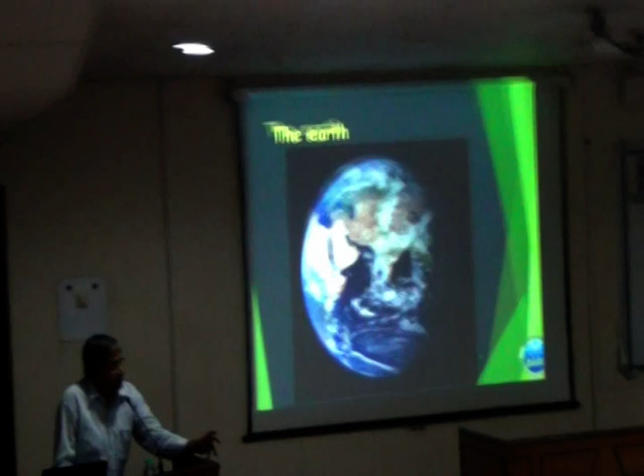And of course, universe, you see so much of light coming, solar system, you see so much of light coming, but you may be wondering where from Earth is giving us radiation. Earth has in it uranium-238, thorium-232, then potassium-40, then radium and all other things which give you a lot of radiation. But more important, comparatively recently it has been found that we get anti-neutrinos from the center of the Earth. What does it mean? That means some nuclear reaction is going on inside the center of the Earth.

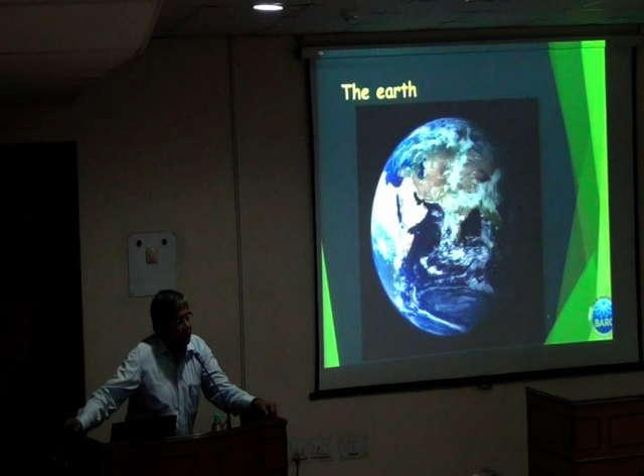And one of the hypotheses is that there is a core of uranium about 8 kilometers in diameter at the center of the Earth. Nuclear reaction is continuing, and you are getting heat and radiation out of it. And another number I can talk about is that whatever radiation Earth receives from the sun, it emits double that radiation. Where from is it coming? Again, it is coming from radiation only in this form. So radiation is something you cannot avoid. But I am not talking about this topic, but something more.

Then, in the time scale, humans evolved 2 billion years later, and everything was fine about this environment till 200 years ago, when our friend James Watt, our scientist, our engineer James Watt, I think you have to say he is the topmost engineer because the industrial revolution started with his discovery. So these 200 years we have done everything that is possible, of course slowly, to pollute the air, to contribute to global warming, and this has started challenging our own existence. So it is much more important than what we can think of.

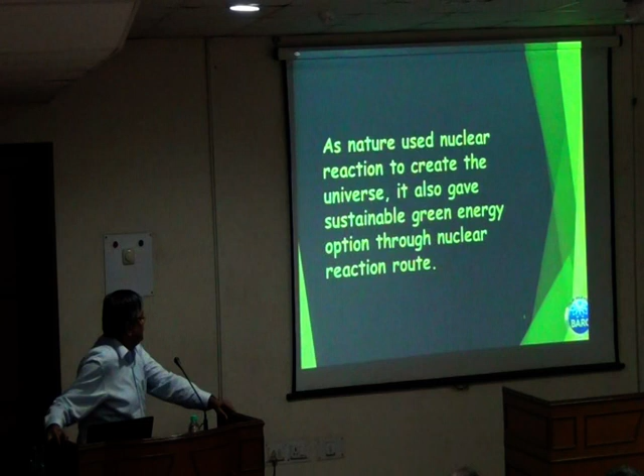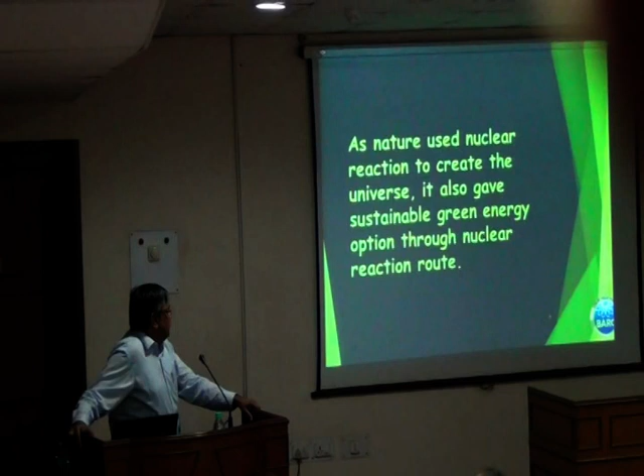But at the same time, when all this is happening, nature has given us an option to use nuclear reaction, which was the nuclear reaction used to create the universe. The same nuclear reaction can be used to form a sustainable green energy option. So nuclear reaction, I am not talking only nuclear energy, nuclear reaction would obviously mean solar and nuclear power, which we talked about.

Then quickly, what is the tool that is available with us to use this nuclear reaction or nuclear energy? One is, of course, you burn uranium in a reactor, we will go into more of it, but in our country we have got very little uranium by the standard of the energy demand that is there for us, which is about 2 lakh tons, and out of that about 1 lakh ton will be useful. And this 1 lakh ton of uranium can give only about 10,000 megawatt electrical power capacity, which is going to last for about 60 years. Every plant that we make will last for 60 years. What happened?

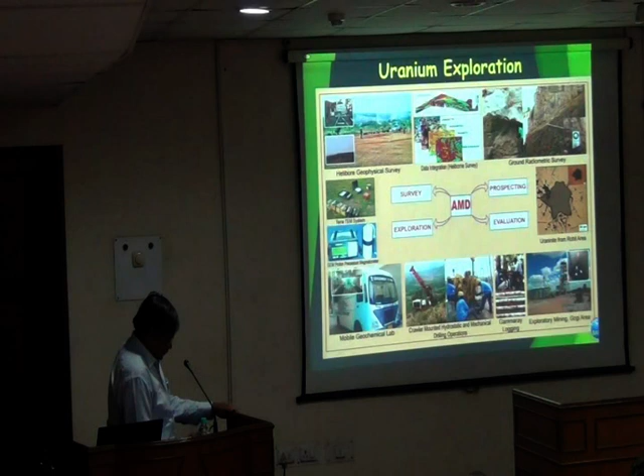Then they have mines at 3 places, all these areas that are being shown, and there are 3 places where they process, and this goes to the place known as Nuclear Fuel Complex. As a matter of fact, I know that at least 2 persons mentioned to me Dr. Chaitanya Ganguly. Chaitanya Ganguly sir was chief executive of this place for quite some time.

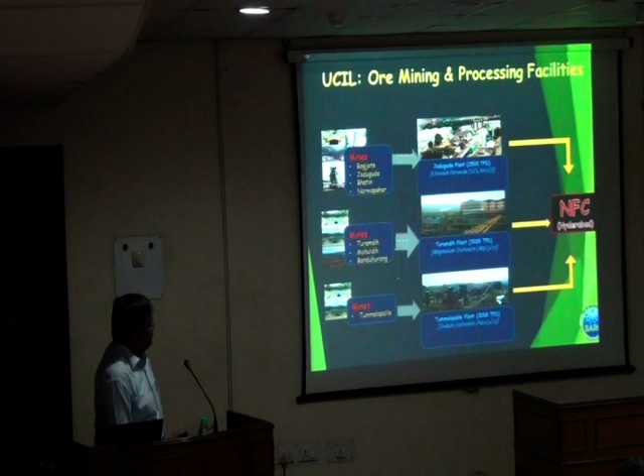Now here what happens is that this uranium corporation, they take out the uranium, which is in U3O8 form, it is converted to UO2 powder, then it becomes pellet, that is by powder metallurgy process, and then it is put in this type of tubes, which is made up of zircaloy, and then these pellets are put into that and sealed. This is what we call fuel assembly.

And obviously to make this, we have to do one more thing, is to make these cladding tubes in which these pellets will go. So to do that, we start with zircon sand, which is there in Indian soil. From that it goes to zirconium oxide, zirconium sponge, zirconium alloy, and fuel tube components. Finally it comes out of this. And that's how it makes the fuel assembly.

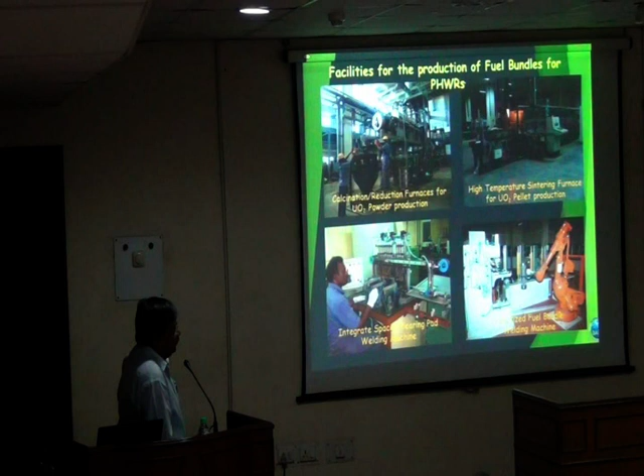This shows some of the pictures of this particular plant, nuclear fuel complex. Maybe if some of you are interested, you can always tell us. We can arrange a visit into this place. And by the way, whatever I am showing you, if anybody is interested, particularly my student friends, you are always welcome. Come in a group and you can always see that.

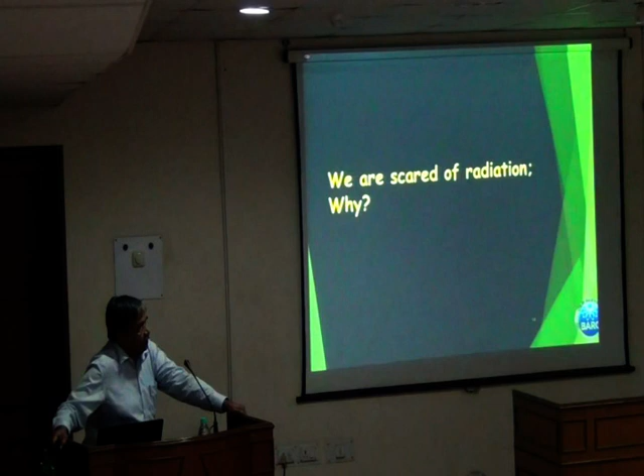Then let me take a deviation. So you know now what is the way to explore or exploit the process of radiation to get energy. Whether it is green or sustainable or not, that question we will answer at a later point of time. But we all know and we all agree that we are scared of radiation. But why?

See, again, all of you know that the universe was formed with a Big Bang. That is as far as today's science is concerned, they tell us that way. And this Big Bang has happened, and we are not unhappy about it. Because anyway, it happened long back, when we were not there, and it has not caused any damage that we can think of.

I take a further diversion here. This Big Bang, it is just to tell you how Indian science is progressing, because at least part of you are science students. See, we have a telescope, which is the MACE telescope. This is 21-meter diameter, coming up at a place known as Hanle, Ladakh, where the temperature is minus 40 degrees C, absolutely no humidity, and the sky is always clear. So that is the best place to receive radiation.

What happens is that those radiations coming from 14 billion light years away, that means which were formed at the time of the formation of the universe, they reach the Earth's atmosphere, and then they convert into what is called light flashes or Cherenkov radiation, and that is what is picked up by this, and then data is analyzed.

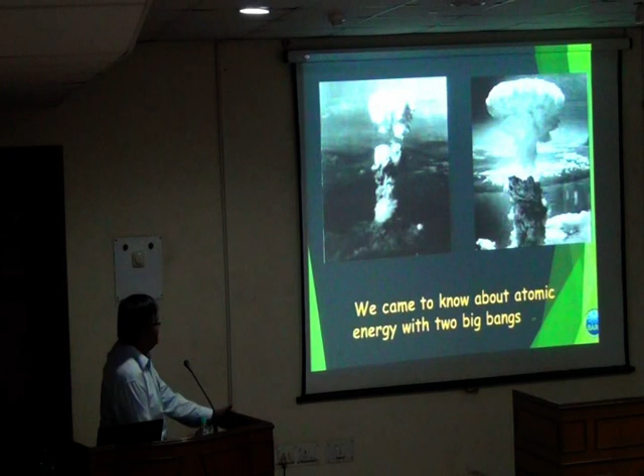But then why are you scared of radiation? Reason is simple, that humans came to know about radiation through these two Big Bangs. One at Nagasaki, another one at Hiroshima. That is why we are scared of it, and we are right about being scared of it. But if you know the true story, then actually this has to be analyzed and seen in a different way. So we should be scared of atomic bombs, but there is no need to be scared about radiation.

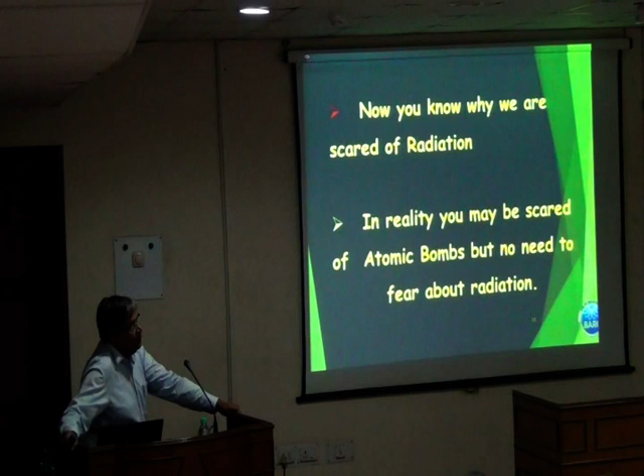And the easiest way to appreciate that is that all energy around us is originating from nuclear reaction. Somebody will ask where wind energy or fossil fuel is coming from; you think it over, everything is originating from nuclear reaction. So what is wrong about nuclear reaction? This is only giving us energy. We get radiation from the sun, we get radiation from the earth, we get radiation from home as well as this auditorium, and we also get radiation from medical checkups, air travel, etc.

So this gives you some number. The total amount of radiation received by one average human being who is not a radiation worker or doesn't stay in the radioactive area is of the order of 2.4 millisieverts per year. And out of that, 1.4 millisieverts come from just the air he breathes. You cannot stop breathing air, so you are going to get this much. You have to live on the surface of Earth, so you are going to get this much radiation. You have to eat, and you will get this much of radiation.

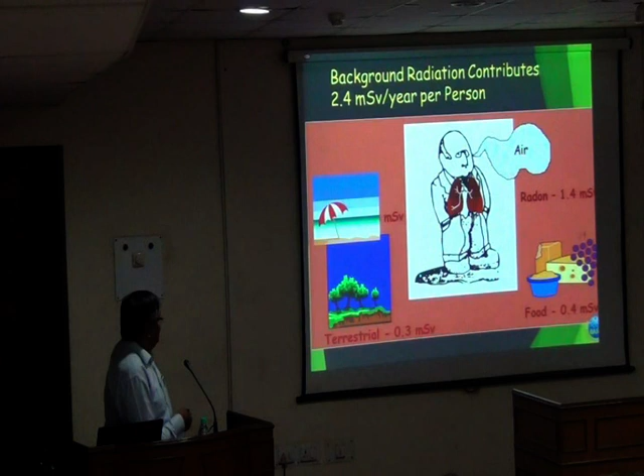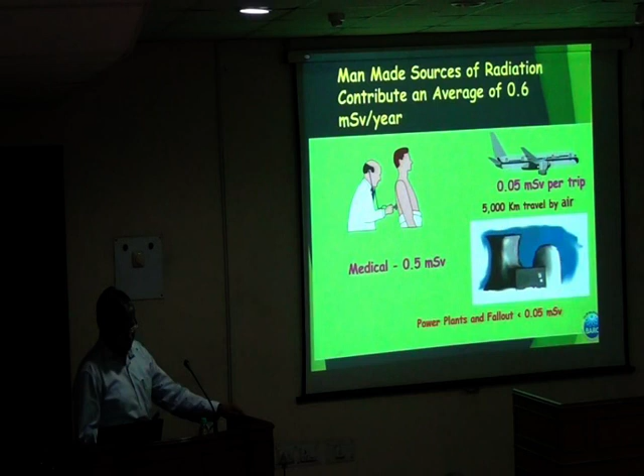And similarly, all other sources. Now, next slide you have a look. See, if you are going to take a simple X-ray, you will get 0.5 millisieverts. If you have traveled about 5,000 kilometers, that means, say, Calcutta, Bombay and back, I am going to get this much radiation by the time I reach back Bombay, just because of this travel. And if you live just at the edge of a nuclear plant, you are going to get 0.01 type of number. So why are you scared? There is nothing to be scared. Or those who say they are scared, why are they scared?

Now there is one more finding, and maybe it's going to become more accepted 5 years from now. We are doing a lot of research in this. See, Kerala, one edge of about 400 kilometers has got a lot of radioactive material in terms of thorium, and that gives you a lot of radiation. Those people who have been living there for hundreds of years get much more radiation than the 2.4 millisieverts I told you about. So blood samples from them have been taken, and they have been irradiated to a very high level of dose. And then we see after that irradiation how fast DNA is recovering. So the finding is something of this type.

If you are living in this high radiation area, your DNA repair takes this much time. Whereas if you are in the lower level of radiation area, it takes more time. That means it is indicating that probably it will be well established in a few years from now that if you have been exposed to irradiation, you are going to recover from irradiation damage much faster than if you have not been.

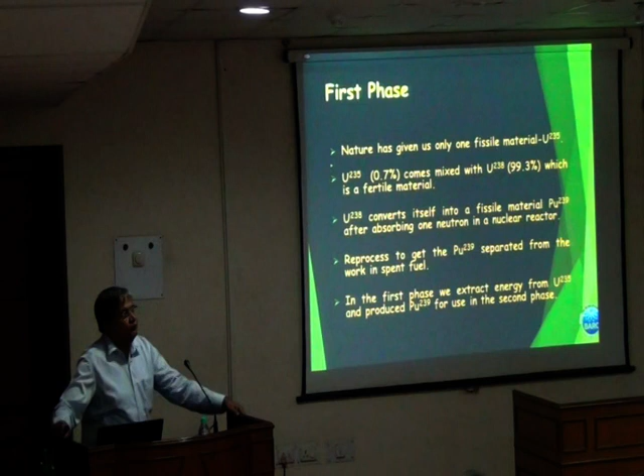Uranium-238 converts itself into a fissile material, plutonium-239, after absorbing one neutron in a nuclear reactor. In every nuclear fission, you bombard a uranium-235 atom with a neutron, it will give 2.5 neutrons. One neutron will go on to produce plutonium-239, the other one will go to produce the next fission, and half of it will get absorbed in the structural material. So as you are burning some uranium, you are also producing plutonium-239. And this is a man-made fissile material on the surface of Earth.

Then we have a process known as reprocessing, which I have been working on for quite some time. This plutonium-239 is taken out from the spent fuel, and it goes back into the reactor as the fuel for the next phase. In the first phase, we extract energy from uranium-235 and produce plutonium-239 for use in the second phase. And just to give you an idea, in the PHWR type of reactors that we use, for every neutron we burn, we get about 0.8 amount of plutonium-239.

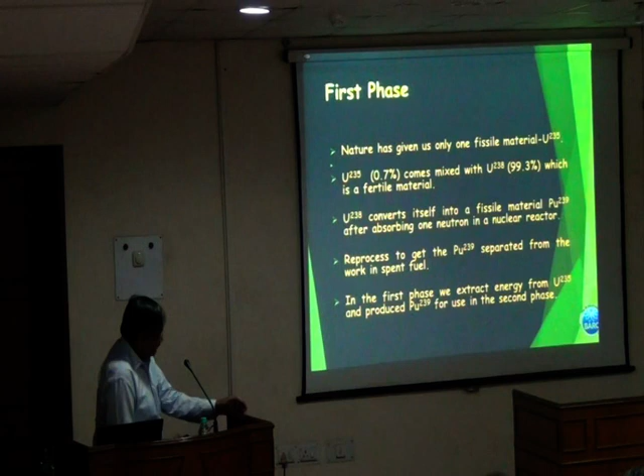And the same thing happens in light water reactors. That is, two types of thermal reactors are there. Light water reactors I will talk about at a later stage. Let me not confuse here. Then this PHWR, which is our mainstay as of today, is a vessel in which heavy water is there, and there are pressure tubes in which the fuel assemblies are kept, which you saw earlier.

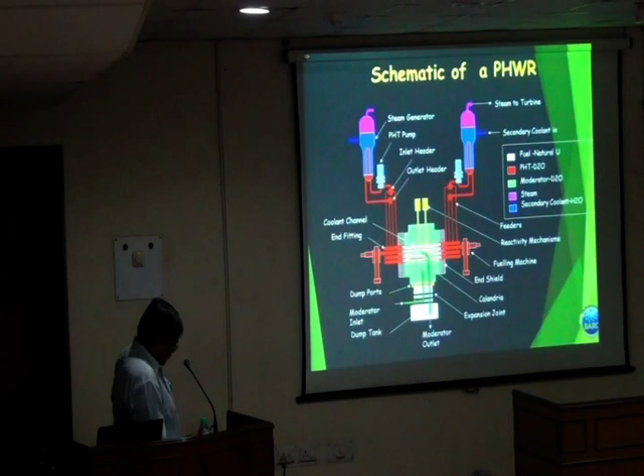And there are two fueling machines: one pushes fuel from one side, the other side receives it, and new fuel is again pushed in over there. So this is what is known as on-power refueling. And heavy water is again passing through this, going to the steam generator, where it produces steam to be used in the turbine, and then again it recirculates. This is basically PHWR. I will not go into more of this.

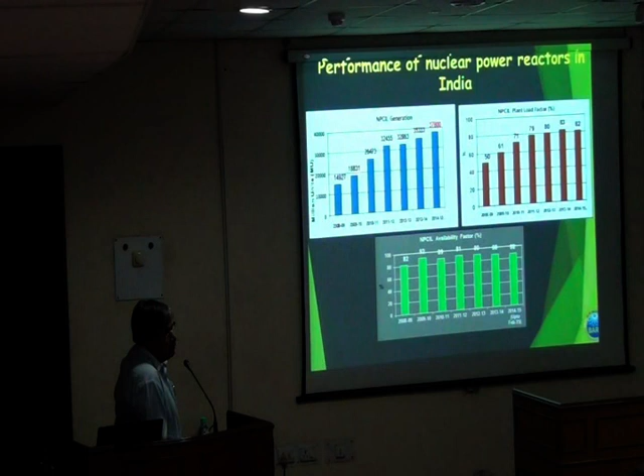But see, in terms of technology, where do we stand? Our reactors work at about 82% capacity factor, and generation is increasing continuously, and this will be more clear at a later date. And this is among the best in the world. With these reactors, you just start it and then forget it. No, you cannot forget it, but it continues to operate, and it will continue to operate for 60 years. There is no other system which can compare with this. And as I was telling, we are doing very well.

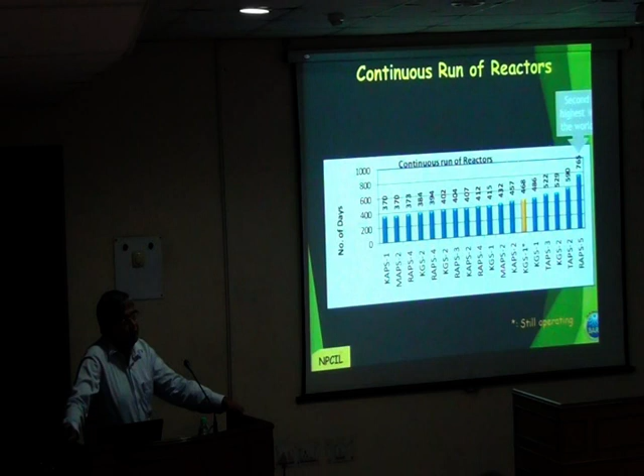We have one reactor which has operated continuously for 765 days, and we had to stop it because the safety committee wanted us to stop it. They didn't allow us to continue further, as there is a rule that after about 2 years of operation you have to take it up for inspection. And this is again the best in the world. Although it is written as second highest, second highest means the other one happened 40 years back. Today, one will not be allowed to operate a reactor in this type of condition. So this is the best in the world as of today.

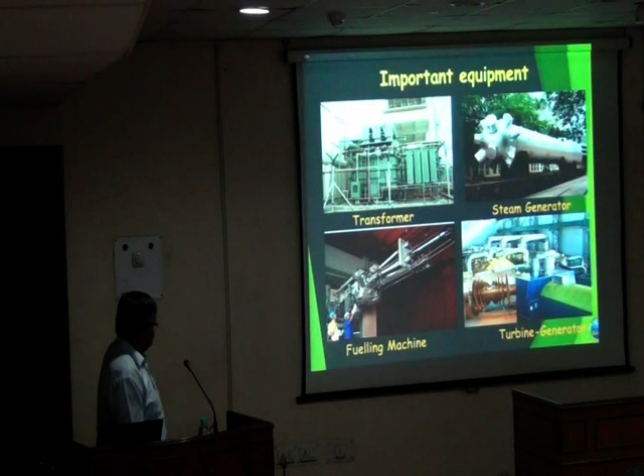This shows some of the components that are there. This is the fueling machine that is being talked about. And as a matter of fact, in this type of reactor, the fueling machine is the most complex component. Then let us go to the second phase. The second phase is slightly different. We make fast reactors using leftover uranium-238 and plutonium-239 from the first phase.

But there is another beauty of this system. Fast reactors produce the required amount of energy and also produce more plutonium-239 than they consume. It means that if you have consumed one plutonium atom to produce the energy, you will get back 1.5 times, 1.3 times, 1.2 times, some such number, much more than what you have consumed. So you put this plutonium back into the reactor to continue the operation, and also take out the extra plutonium and make a new reactor after you have been able to fill it up. We call that doubling time.

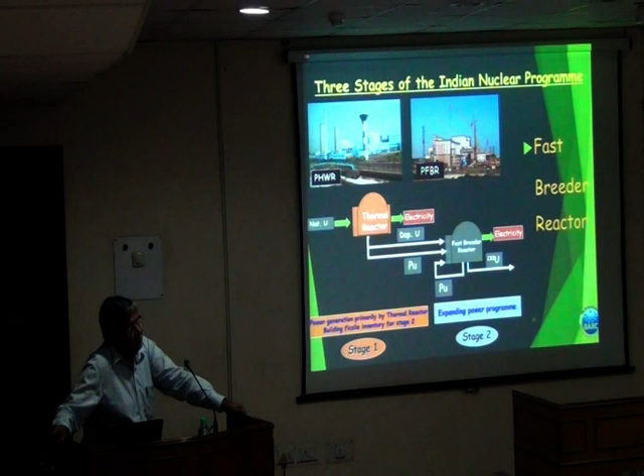And then, as we said, from the thermal reactor the plutonium is going into the fast breeder reactor. Again, plutonium comes out and goes back. Extra plutonium will go to another reactor, and it is also possible to put some thorium into that and produce uranium-233. This we are not going to do now. Towards the end of the program, we will see when exactly these thorium reactors are to be introduced. Because this is one question we are quite often asked: India has so much thorium, why are you not using it? The answer to that is in the next slide. But before that, this is how the PFBR looks at night, quite beautiful.

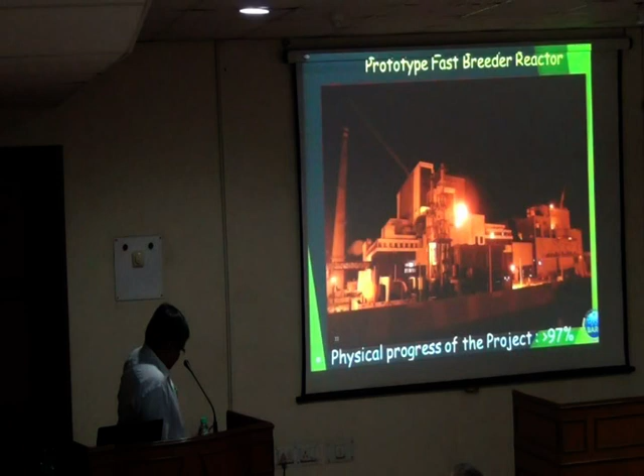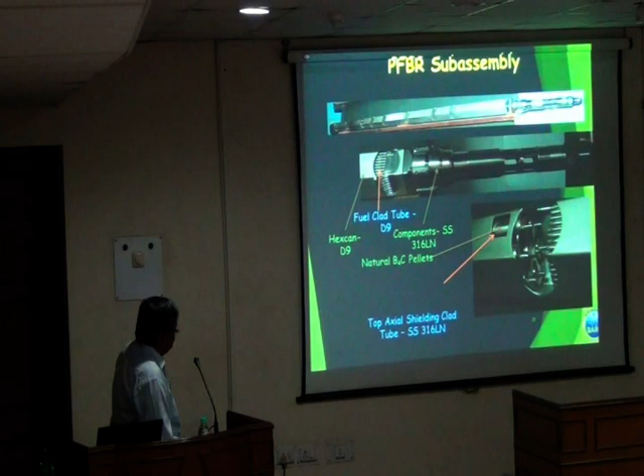This is how fast reactor fuel actually looks. These are the fuel pins, and they are filled with plutonium-uranium fuel. This shows some of the components over there.

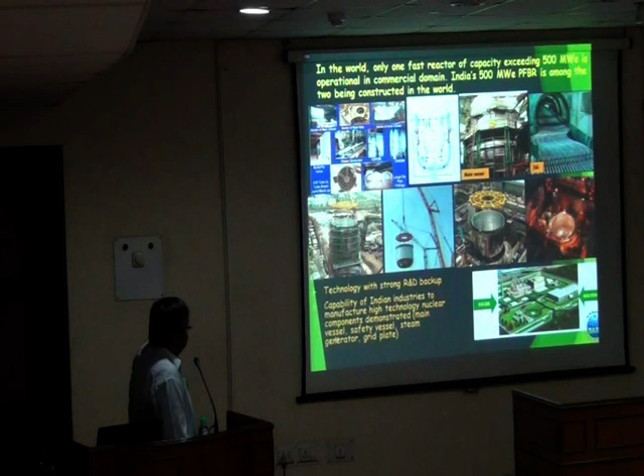Now let us go to the third phase. We convert another fertile material, thorium-232, into fissile material uranium-233. One thorium-232 atom absorbs one neutron, and then after 2 beta decays, it becomes uranium-233, which is a fissile material, again a man-made fissile material. The third phase of reactors are started with plutonium-239 as fissile material, or uranium-233 produced in the second phase of reactor by making thorium-232 absorb one neutron.

And this is what exactly will happen. You will probably come to know about this 50 years from now, when we start introducing the thorium reactor, which is not required now.

Uranium-233 and thorium-232 is separated from waste material by reprocessing of spent fuel in this phase also.

So this is PHWR you have seen, this is the prototype fast breeder reactor you have seen, and this reactor we have not made yet, but we are in the process of site selection, which has been completed, and maybe in a year or so we will start construction of this.

And this is again on the same cycle. First it has gone to the thermal reactor, plutonium and uranium has come out, it has gone into the fast reactor, plutonium has been recycled, and then probably uranium-233 has been taken out, and it has gone to the third cycle, and it is going on in that way.

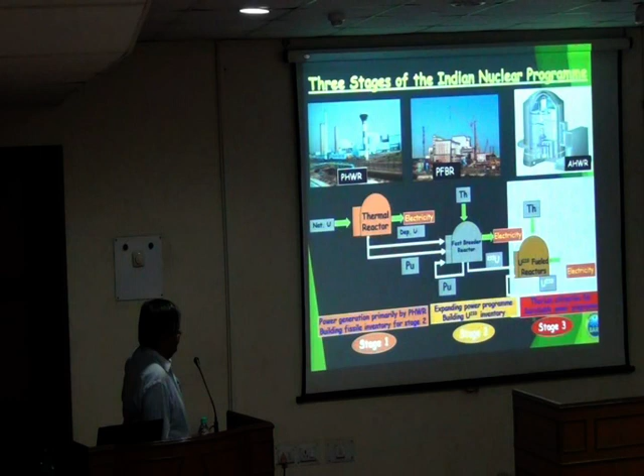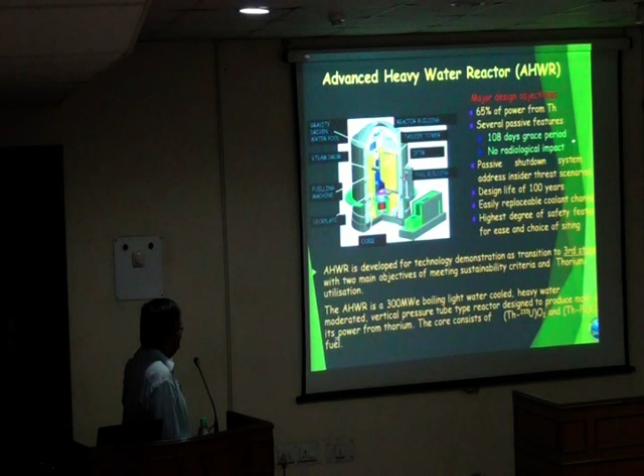And this advanced heavy water reactor, which I talked to you about, will be using about 65% thorium fuel, where 65% of the power will be produced from thorium. This will have 108 days of cooling period, that is, it can tolerate no electric supply or no water supply from outside. You know about Fukushima and what has happened there. So it is a very long time it can withstand, remain intact without getting into any problem on its own.

Then, the life which I was talking about as 60 years, here the operational life will be about 100 years. And there are other features too. This will be a 300 megawatt reactor. Okay, this describes the system which I wanted to show.

Now let us see what is the status of nuclear power as of today in the country. The present capacity is 5780 megawatts. It's very small by total Indian standard, but out of this, it is coming from 20 reactors. Although our power generation capacity in the world is less compared to those doing better than us, at the same time, number of reactors wise, we are not very small.

That is because when we started our nuclear reactor program, we had a very small grid, and a smaller grid can tolerate only a smaller size of reactor. Otherwise, if that reactor trips, cascade tripping takes place. Those of you who have not studied this, you can study what is cascade tripping.

We are likely to go up in another 3-4 years to about double this capacity. As a matter of fact, the government has given us a target of increasing the capacity to 3 times by 2024. That should be possible. And then we are going for new launches, which will take this to about 27,480 megawatts, maybe by 2025 or so. And then by 2032, 48,000 megawatts, I am not very sure, but this will be our target.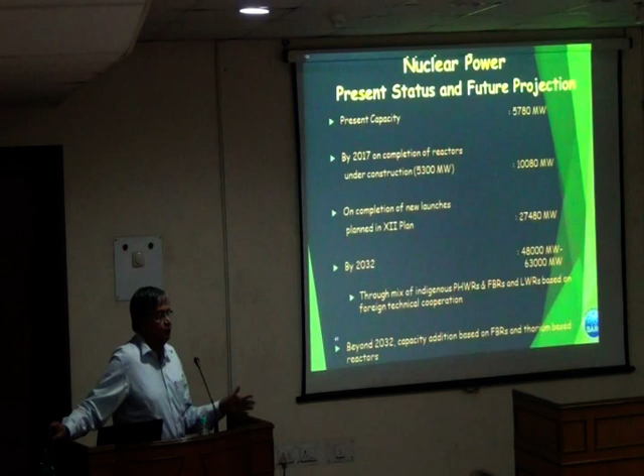And it will be having a mix of reactors. One of them is PHWR, which I told you, that will be a 700 megawatt electrical reactor. Fast breeder reactors which we are making are about 500 megawatt capacity, maybe 600, and these LWRs will be 1000 megawatt or 1750 megawatt, depending on where we are buying it from. These will be foreign reactors, but the PHWR and fast breeder reactors will be ours.

Let us see where else you need energy. Number one, all of you are driving cars, and the liquid fuel will not be available after some time. So what will happen? One option could be electrical power converted into lithium batteries to take care of your car. But enough lithium is not there in the world to make so much for our vehicles. So the next option is to go for hydrogen.

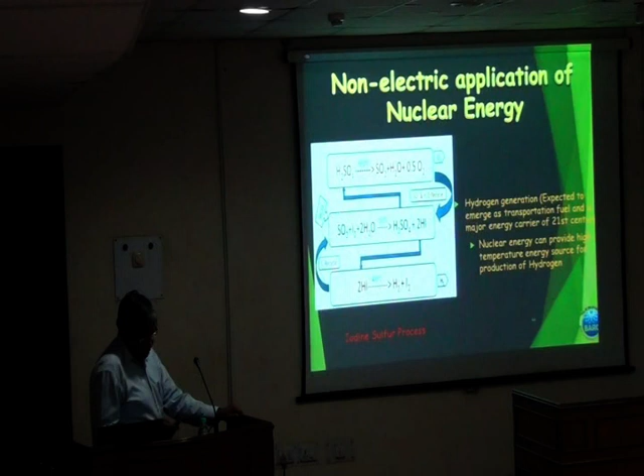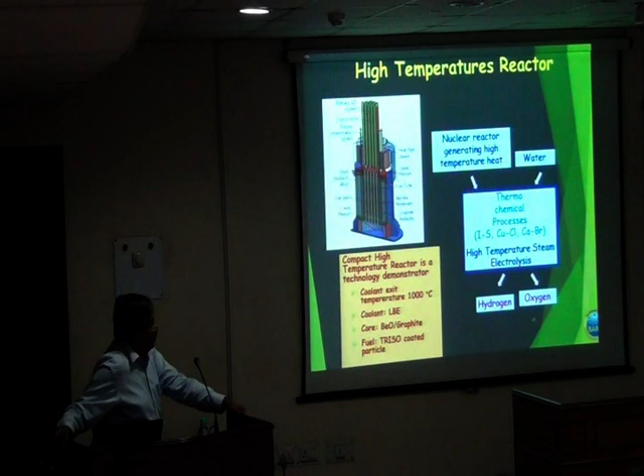Let's split water to get hydrogen and oxygen. That hydrogen process is a very clean process. To make this hydrogen we need a high temperature source, which will come from the high temperature reactor we call compact high temperature reactor, CHTR. R&D on this is going on in BARC. This reactor will generate high temperature heat, water will be put in, and processes like iodine-sulfur, copper-chlorine, or calcium-bromine will convert this steam into hydrogen and oxygen. The hydrogen will go into your vehicle, giving you a clean driving option.

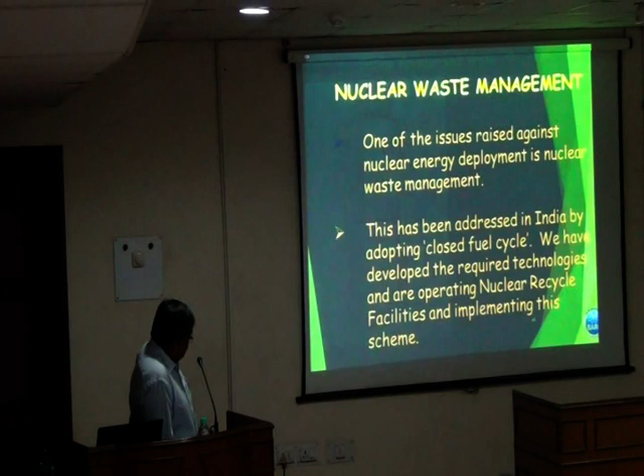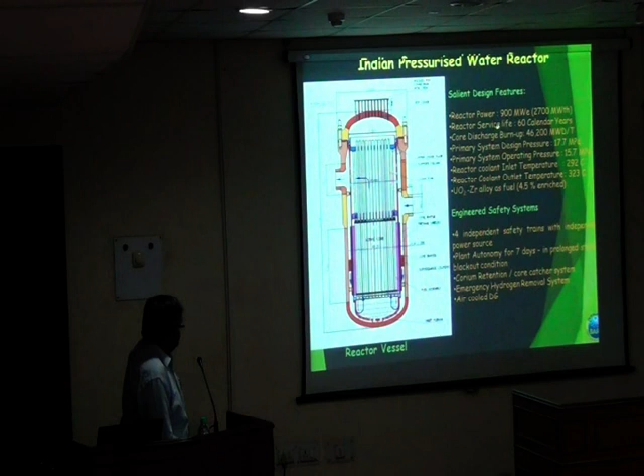Then there is one more thing. As you are aware, we have made nuclear submarines, which are right now in serial production. As a spin-off of that, we have got this reactor technology for pressurized water reactors. These are smaller size reactors, and we have to scale them up and make them suitable for making the Indian PWR. This shows the sketch of the Indian PWR, which will be a 900 megawatt reactor. Why 900 and not 1000? Because we are not able to make an Indian turbine that can meet that requirement, so 900 is more likely possible.

Another thing, particularly for mechanical engineers and metallurgists: the reactor pressure vessel steel is made by only one company in the world, Japan Steel Works. If you can't get it from them, you have to make it yourself, which Russia is doing. So we have also started a process where NPCIL and L&T have put up a plant, and we are hoping to make these forgings for our use. Of course, we are already making forgings for the submarine program at HEC Ranchi, since those are of smaller scale.

Another question that is quite often asked is that we are not doing nuclear waste management, and people say this is a problem in nuclear energy. I want to tell you why people say that and what we are actually doing. What they do is they don't do reprocessing, and when you don't do reprocessing, it's called an open fuel cycle, whereas we have a concept called closed fuel cycle. Closed means we will reprocess, and after reprocessing we get uranium and plutonium which go back to the reactor, and whatever is waste becomes vitrified and stored in a different mode. That is what I am going to describe to you.

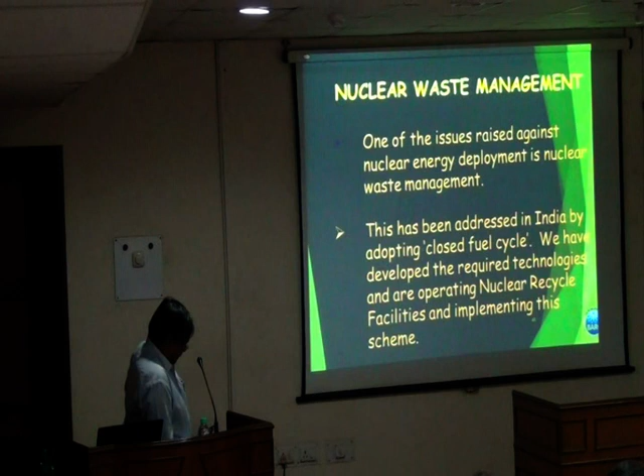If you come to Kalpakkam, you will see the reactor operating there, which is PHWR. We also have a reprocessing plant which takes from there, and there itself it converts into uranium and plutonium, and then it goes back to the prototype fast breeder reactor. Of course the fabrication is done at Tarapur.

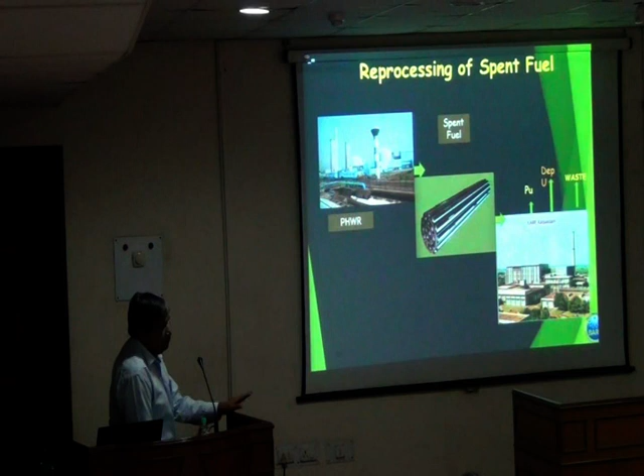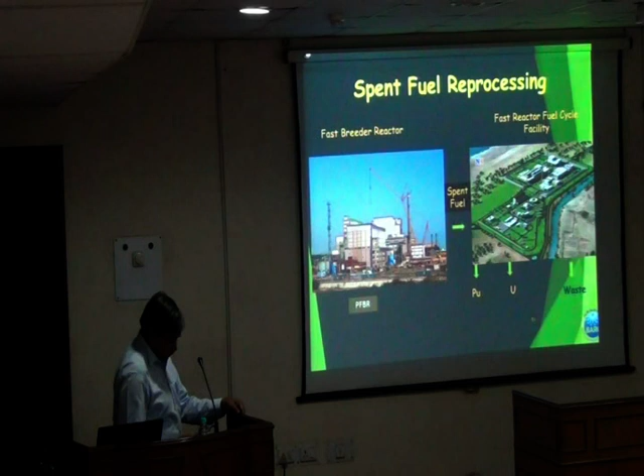Same way, for the fast breeder reactor, spent fuel will come out, and this is the facility which is coming up at Kalpakkam, where we will reprocess and put it back again into the reactor, and additional plutonium will come out, which will be converted into fuel, and probably some reactor which will come up at Kalpakkam will be putting that back in. This is what is again the closed fuel cycle. Nothing goes out.

This shows the inside of a reprocessing plant. This one is, I suppose, at Tarapur. We call it PreFre 2.

Then, technology-wise, we first do chopping. See, this is the fuel bundle. This is called a gang chopper. This whole thing will be split. All these assemblies will be split into some 50 mm long pieces, and then put into a dissolver, where the uranium oxide portion will be dissolved, and then the hull will be taken out. The next slide will show that.

After this dissolution, uranium and plutonium will be separated, and we do partitioning. Similarly, waste also will be taken out, and plutonium and uranium will come out in the form of acid. Then we convert them into oxide. So that is true both for plutonium and uranium.

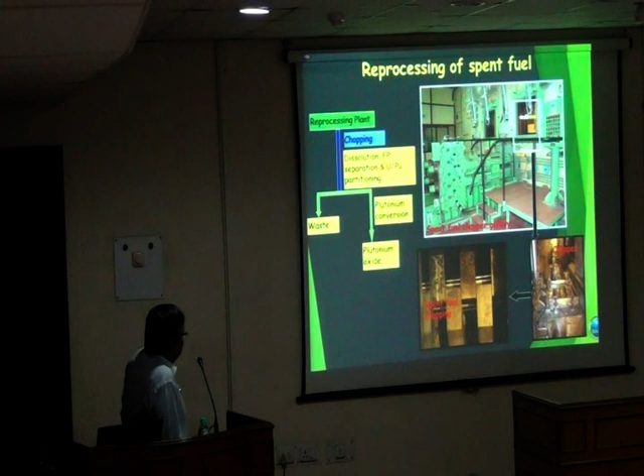So this shows the inside of a reprocessing plant. Normally you will not get a picture of this type outside, because nobody talks about it. And this is the hull, the hull pieces I talked about. Hull would mean in this case those zircaloy cladding which I was talking about. Both sides are open.

We have already dissolved out the uranium oxide. Actually, this plant is basically for chemical engineers. I don't know how many chemical engineers are here. This is actually a marvel for them. And all of this happens by the solvent extraction process.

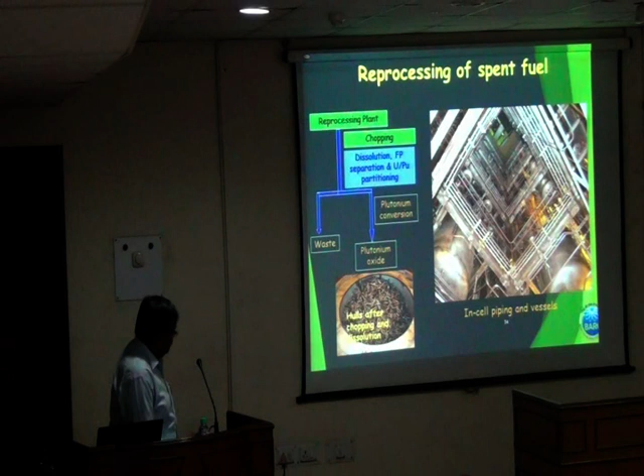Then, as I showed you, this is the fast reactor fuel cycle facility, which is again coming up at Kalpakkam.

Then what happens to the waste? Let us answer that question now. This waste comes out in the form of fission products, acids of fission products. So high level acid is there, and then we have a temperature of about 1000 degrees C, in which we pour that liquid, and they form a continuous matrix. This process is known as vitrification. They get vitrified, and then this liquid at 1000 degrees C is poured into these canisters.

We form a large number of canisters, and it is stored in this facility for about 60 years. They will cool down sufficiently and be ready to go to the repositories, which may be about half a kilometer down from the surface of the Earth. By our design we need granite there. Some people go for clay, but nobody has made this repository yet because the requirement has not come. We in India feel this will be required only around 2070 or so, so that is why it is not being done, only research is going on.

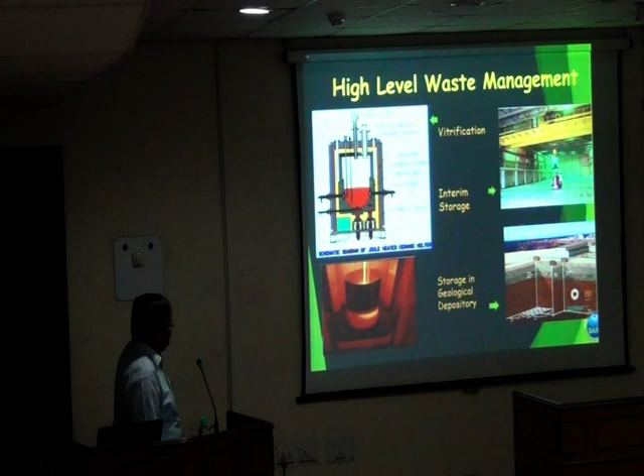Now you will see this is a very old slide. It's not an old slide exactly, but the photograph was old, taken about 25 years ago when we were doing this vitrification technology. The waste that people are concerned about - for a family of 5, this is the waste generated if they consume all the electricity coming from nuclear energy. But I have a separate reason for showing this slide: 25 years ago we were at one place, but today's technology has advanced much farther. Today's waste for the same family will be only this small part of that range.

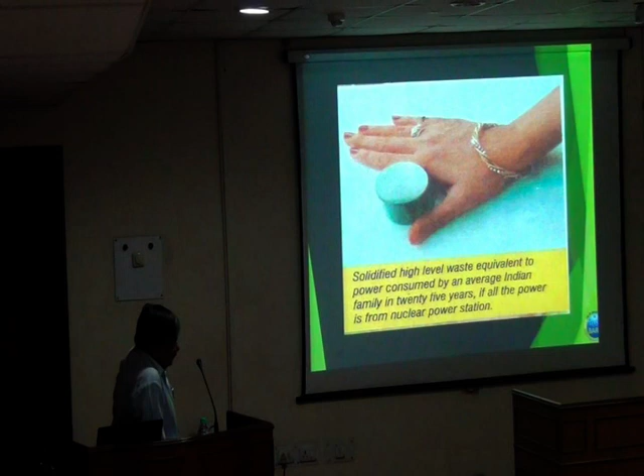Let us see what is the technology. And we are leading in the world in this technology. And we have a plant operating already at Tarapur, and something similar has been made at Trombay also. So as I told you, after reprocessing, total waste is only 1% of the spent fuel. And out of this 1%, minor actinides is 3%, and fission products is 97%.

Fission products have a half-life of 30 years, and minor actinides have a half-life of 10,000 years or more. So you have to store this much longer. Whereas this you can keep for 200 years, 300 years, and then you can forget about it because it will come down to the level of a mine. Radioactivity at the level of a mine. And that is why

Professor Ray, that's why I was asking about a concrete building for these 200, 300 years, that's what we are looking into. Where we can store it, of course under supervision. Whereas whatever goes inside the repository, there the storage will be there, which we will not bother with, only some monitoring will be there.

But then we have technology for this also. This is not left as it is. It can be burned in fast reactors. Of course, this fast reactor will be a different type than what we are doing, and then burned in an accelerator driven system, which I'll tell you a little more about later. But what has come out is that we have separated this fission product, particularly cesium, and cesium we have converted into the cesium pencil, that is again a vitrified pencil, and this goes into a blood irradiator.

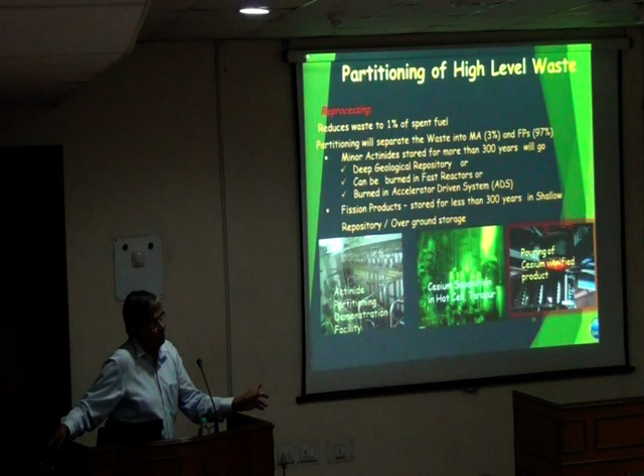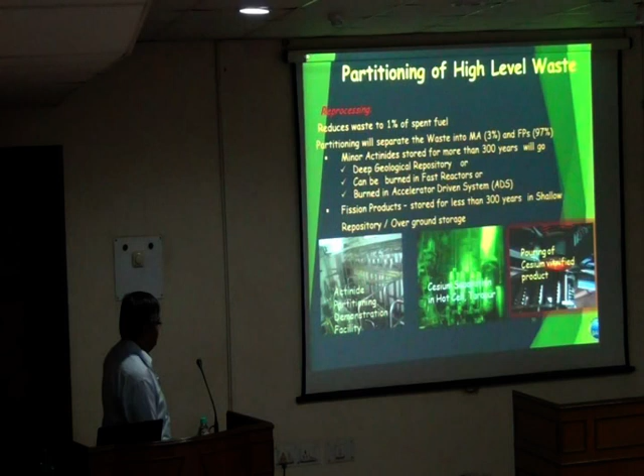And again, we are first in the world to do it, because other people were doing it with cesium chloride. Cesium chloride is a powder, and there is always a danger of contamination spreading. Actually, these days whenever we meet foreigners, particularly developed nations, they will always talk about collaboration with us. So this is one area they want to collaborate. So our scenario in atomic energy has changed, and instead of us talking about collaboration with others, people talk about collaboration with us. And this plant is operational at Trombay.

And before we end this part, of course we have to tell what happens to that uranium and plutonium, how it gets converted into fuel. This is a plant at Tarapur, which we call AFFF, Advanced Fuel Fabrication Facility. At NFC, all the components are open. And here everything is inside the glove box. Why? Because plutonium is toxic, so it cannot be allowed to come out.

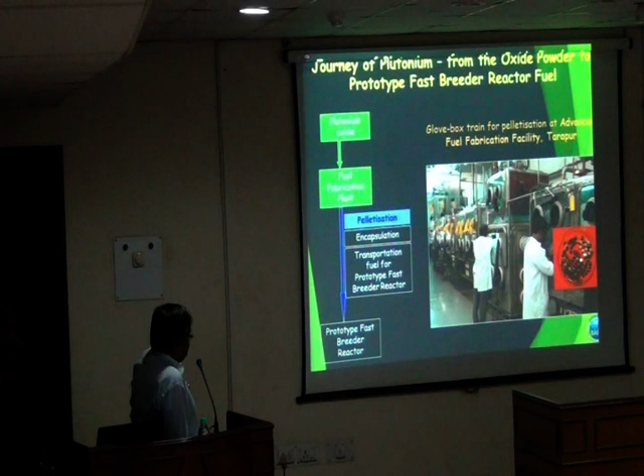So all these boxes are maintained at negative pressure, nothing can come out, even if there is a puncture in the gloves they are using. Through these gloves they are putting their hands into the system. And these are uranium oxide pellets, and the technology is safe. This one is the pins for the prototype fast breeder reactor, made by BARC and supplied to BHAVINI for PFBR criticality, which we expect around the middle of next year.

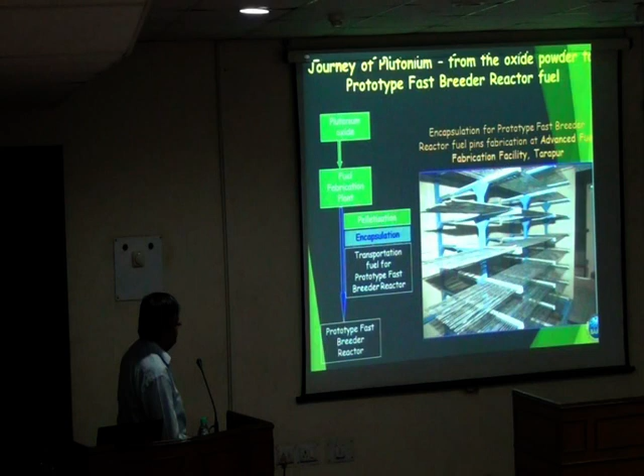Then this I have probably talked about, energy sources for the next 500 years or 1000 years. You will see this later. But let me see what else is happening in terms of technology for the long term. Long term is an infinite period. There is one technology which we call an accelerator driven system. We accelerate protons to a very high energy, about 1 GeV, and when it hits a target of mercury or lead bismuth or something like that, it goes through a process of spallation. In every nuclear fission we get about 2.5 neutrons, as I told, but in spallation you get about 30 neutrons.

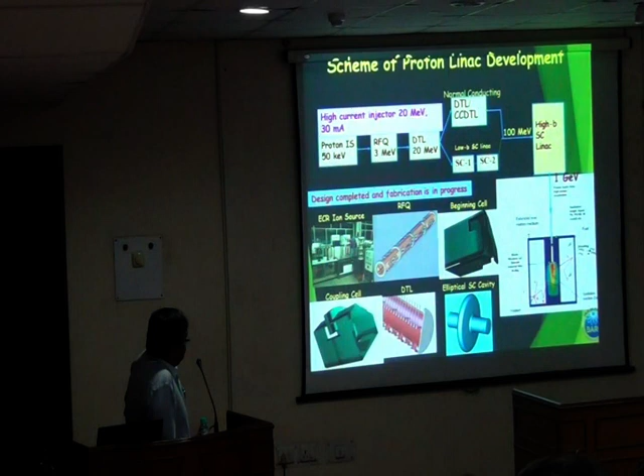Okay. Then let us go to the ultimate solution of energy. So finally it has to be something like the sun, which will continue to give energy. Everybody knows that in the sun what we are getting is fusion. But you know, if it was pure fusion, then it would have been over in 27 days or something. The sun would have burnt itself out. So it is not pure fusion; they call it some weak interaction, weak reaction and all those things. That is why it will continue in the future.

So a similar thing we are trying to do in ITER. ITER stands for International Thermonuclear Experimental Reactor. And this is also a Latin word that means "on the way" to solve energy.

This is a collaboration of 7 countries. The project cost started at 1 lakh crore and now maybe 2 lakh or 3 lakh crore. Some 7 countries are participating, including the European Union, and India is contributing 9% of that. It's a huge amount, but still we are contributing. But by contributing 9%, we will get the entire technology for all the processes, all the steps.

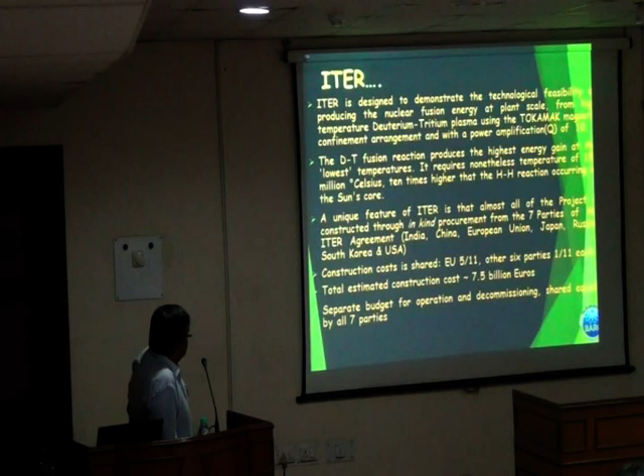Just to tell you a little more about this ITER, which is a tokamak: it will be giving 500 megawatt thermal average, because it is not a continuous process, it's a kind of pulse process, and peak power will be 1194 megawatt thermal. So it is a small reactor in terms of thermal energy. And plasma burn time is 100 to 3000 seconds, pulse repetition time is 1800.

This is not important. But what matters is that this reaction will be happening at 150 million degrees C. That is the temperature of the sun. So we have to create the sun on the surface of Earth. And it is progressing slowly. Probably 2021 is not possible, maybe 2025 or so, that first fusion will be seen.

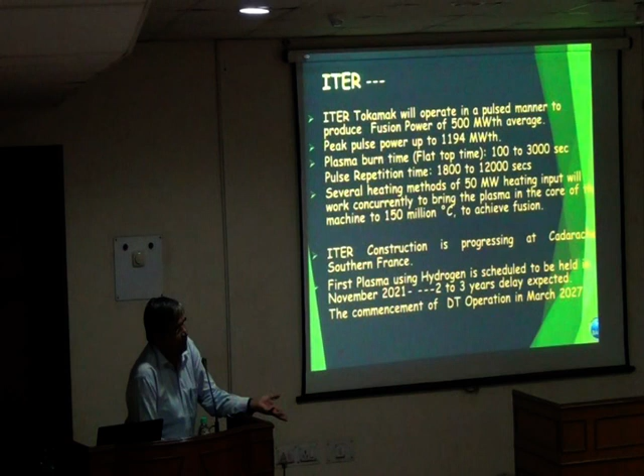But the point is that once this technology has been established, it will solve the problem for eternity. Because only half a cubic mile of seawater has enough deuterium to take care of the world's energy. Think of how many cubic miles of water are there in the sea. So it is a new solution for eternity.

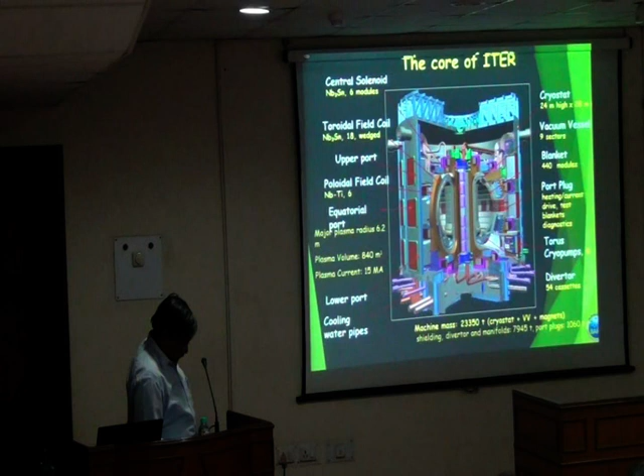This shows how it looks, and as a matter of fact, you saw our fission reactors; they are the simplest. Next more difficult was the fast breeder reactor, it's much more difficult than that, and obviously this is 10 times more difficult than that. Again, I will not go into this, because if you want, I can always pass on the information if you send me a mail.

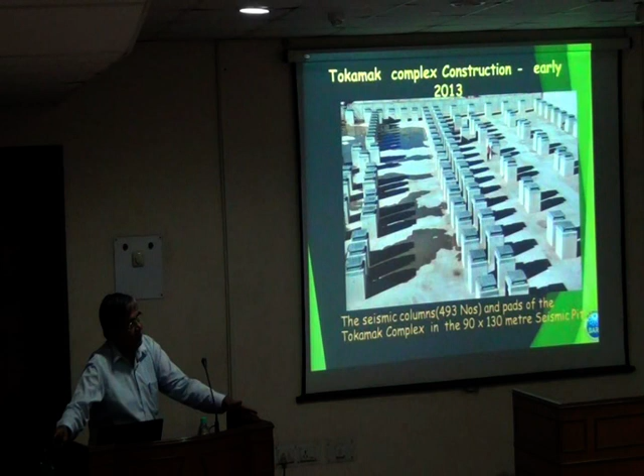Okay, I've talked about many things. I don't know how much you have believed me, but I have a moral responsibility to tell you why I call this energy great. Let us see if now I am able to convince those of you who have not been convinced so far.

Let us compare between coal and nuclear. You take the case of a 1000 megawatt electrical plant, operating at 80% capacity factor, one coal power, one nuclear. If it is Indian coal, you will need somewhere around 5 million tons of coal to keep it operational for about 300 days a year.

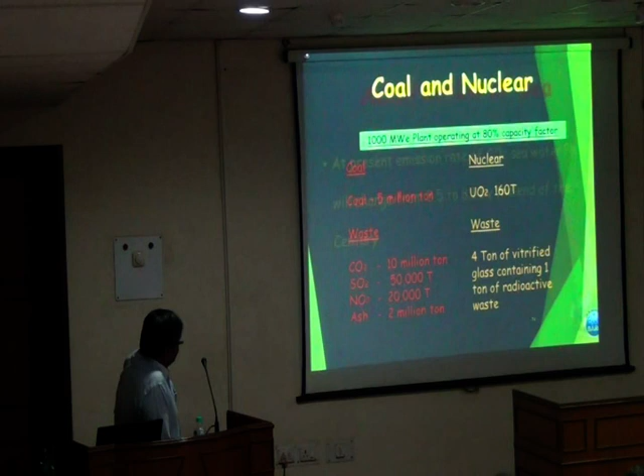Then, I do not know how many of you know this. CO2, all of you know that it causes greenhouse gases, global warming, etc. But still, what is happening to the sea? The sea is getting acidified, and if you take data from just after the shore, you will get a very low pH value, and as you go into the sea, it will reduce. But what has been calculated or projected at the present rate of CO2 emission, this pH will come down from 8.5 to 8.1.

There is an inferred history that about 200 million years ago, something like this happened. Dinosaurs died 65 million years ago because of probably a meteor hit. But here, something like a volcano eruption released so much CO2 that this pH went down to below 8, and 90% of the sea life and probably 70-80% of the surface life were all killed. Of course, later on this slowly came back; it has taken so many million years to come back to that level. So we are trying to do something like that by operating these coal based systems.

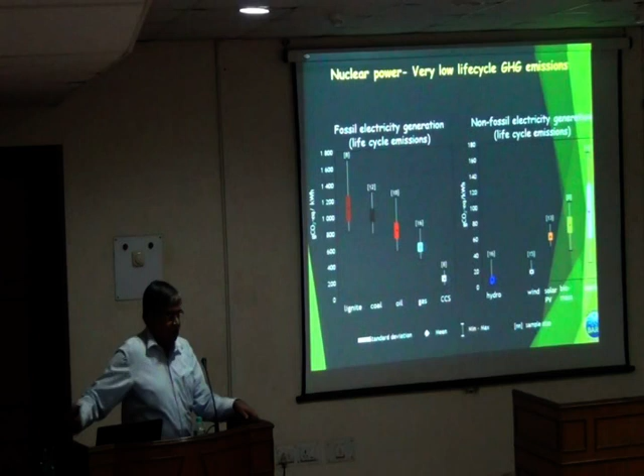Then take another one, what is called low life cycle greenhouse gas emission. This is CO2 equivalent per kilowatt hour, that's the table. If it is nuclear, it is about 10. This 10 comes from the fact that you have to make those items going into the plant, where you will be producing CO2, because you have furnaces and electric power, etc. All that is taken into account. Whereas solar photovoltaic coming from China is about 60, that means six times nuclear. And if it is coal, this number is about 1000, so you can calculate the ratio. This is as far as greenhouse gas emission is concerned.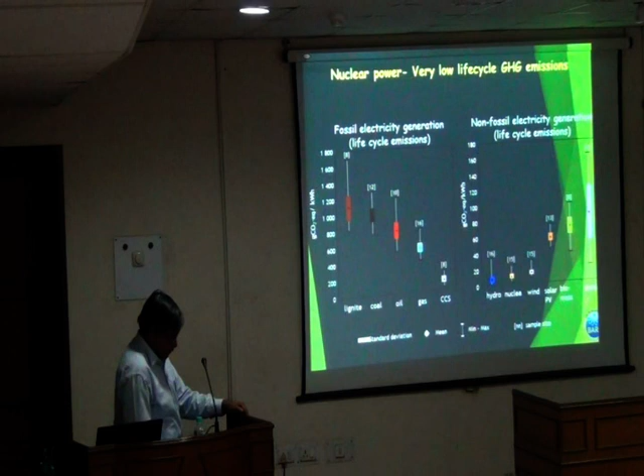I think I have told enough. And whatever data I have told you, if you don't believe it, you can check with the internet. I have picked up the numbers from the internet.

Then the other question I must answer is why it is sustainable. Sustainability means that if you have opted for the system, you will be able to take care of it for a long time. So let us see. We have about 55 billion tons of coal in India which is right now exploitable. And then a total of 110 billion tons of coal is there which we can take out. Everything may not be possible, but something you will be able to take out. And we have a total of over 200 billion tons of coal, which may not be possible to exploit.

So 55 billion tons of coal will give you something like 10,000 gigawatt electrical years, which means if you are operating about 400 gigawatt electrical every year, it will last you about 25 years. Maybe it will become factor 2 or factor 3. Whereas take the case of nuclear: in a thermal reactor this will be about 300 gigawatt electrical, and the same will become 40,000 gigawatt electrical if you go for fast reactors. That means this will take care of us for 100 years.

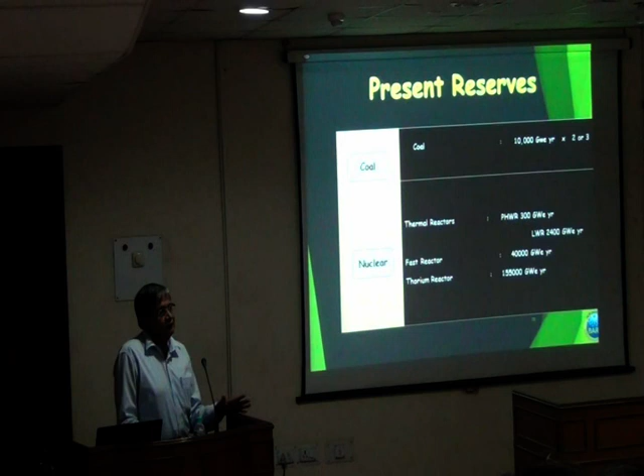And there is the light water reactor being added, and if that is added, it will take care of another 2400 gigawatt electrical, about 8 times this. So this 100 years may become about 800 years. And then of course comes thorium. It will take care of us for at least another 500 years. So even if ITER type fusion reactors do not come up, for at least 600, 700 years we have no energy problem if we take the nuclear route.

That is why I call it sustainable. But I would like to give you one more parameter here. Supposing you want to put up 10 gigawatt electrical, that is 10,000 megawatt electrical power capacity for your country. If you take the wind route, you need about 5,000 square kilometers. If you go for solar, you will need about 400 square kilometers. Whereas if you go for nuclear, it is only 2 square kilometers.

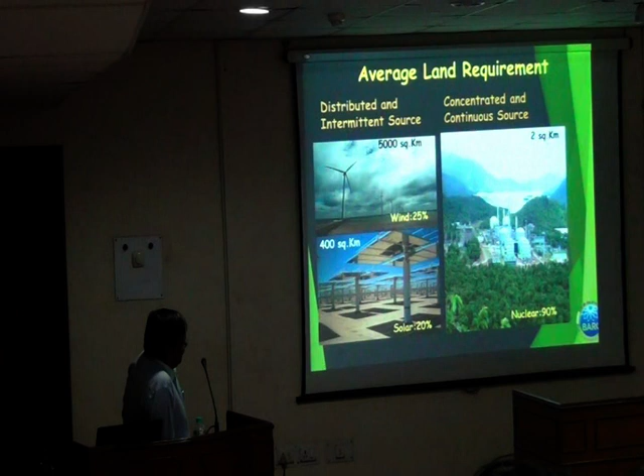Because it's such a big population, land itself is one big issue, and you know how much problem there is in our country to acquire land. Probably today's biggest problem is acquiring land. And of course, solar and wind have the other problem, that they are available only for 25% of the time. Solar is available only for 20% of the time, whereas nuclear is available for 90% of the time.

I will give you one more thing, because I am trying to prove my point. In the last 5-6 years, we didn't add much nuclear capacity. It's only now we have added this Kudankulam unit. In this time, solar has made real impressive growth from about 7,000 megawatt electrical to 35,000. So 7,000 to 35,000, a 5 times increase. And we have not done anything.

Whereas if you see this in number of units of electricity produced, although we have not added any capacity, we are remaining at this level, and solar, with all that 5 times addition, is still at this level. This is because of the fact of 20% and 90%. Solar will not be able to solve all the problems. It's not a magic solution. It has to be taken in a particular combination. Okay.

Then, in terms of why again sustainability, one is price. Nuclear power, say Narora power station, gives per unit 2 rupees 49 paisa. Other plants in UP, you can see 4 rupees 29 paisa and this type of number. In Rajasthan, RAPS, even the new plant is giving at 3 rupees 44 paisa, and all others are higher than that. Gujarat, Kakrapar, it is 2 rupees 38 paisa. Coal is nearer to this figure, but the new unit is going to 5.

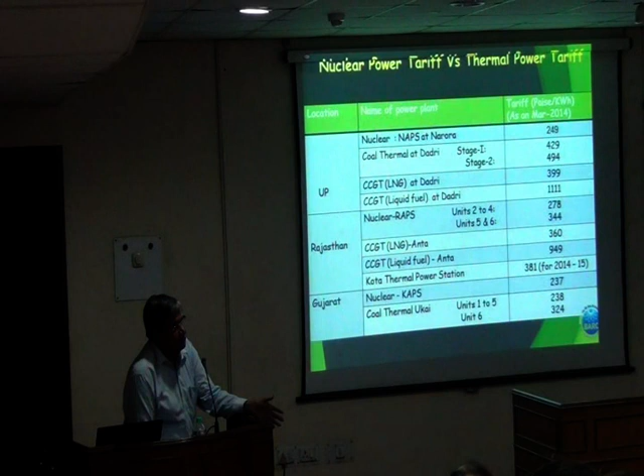So nuclear, even today, is cheaper, particularly in a place where you are not putting up the thermal power station on the coal pit, away from the coal supply point, because of the transportation cost, the cost goes up. So large-scale exploitation of nuclear energy is inevitable. Whether I like it or not, it is going to happen. Fossil fuel is going to get exhausted, and after that, energy will come only from nuclear and renewable, mostly solar.

In some countries like France, the nuclear and solar power supply is managed by the same agency. Their Atomic Energy Commission manages their solar energy. That is because this is the power of the future. That is the way it has been done.

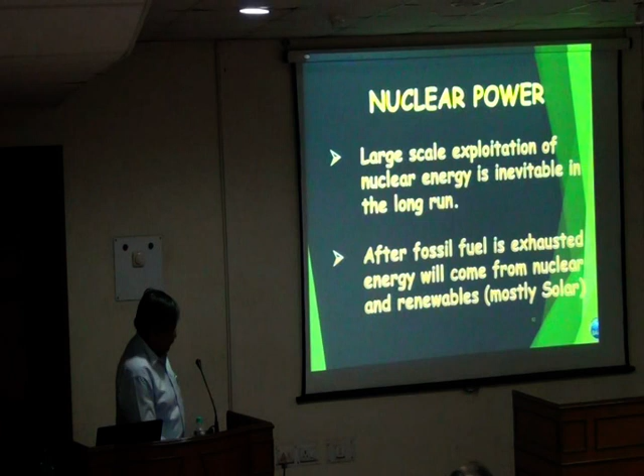Then the last part of my presentation, what is likely to happen in future. Everybody has his opinion, so I also have the right to my opinion. In my opinion, as of today, Indians consume about 1,000 units per year, the world average is 2,000 units per year, and developed nations consume about 6,000 units per year.

Whatever we do now, we may put up 100 gigawatt, 200 gigawatt, in India the difference between people in the poverty region and people in the rich region is going to remain. That disparity is reflected in unit consumption. 60% of Indians are going to consume less than 100 units per year. So what will happen if you produce a lot of power? They will not take it.

So my assumption is that probably this will be nearer to 2,000 units per year, and we will need 500 to 600 gigawatt electrical of installed capacity, taking into account our population will be 1.5 billion by 2050. Because here we are not controlling anything. It is happening, whatever is inevitable.

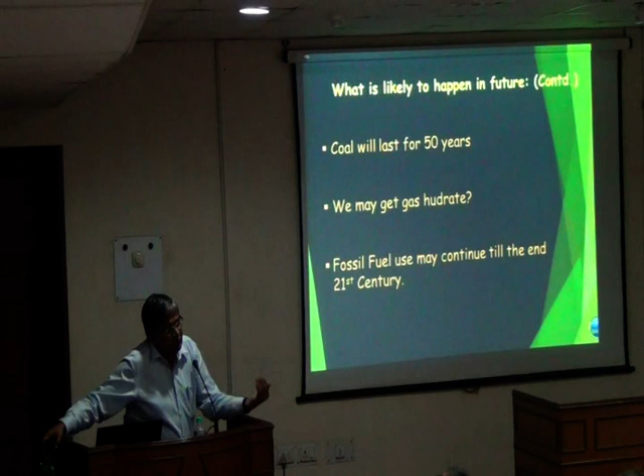So there is probably a technology which will come up, and people have started talking about it, by which it will be taken out quite easily, except that going down to that 2 kilometer depth is the problem. And you will get lot of methane gas. And what is being told is this is 1500 times the natural gas that we have. So probably it will be able to take care of 100 years for us if we start exploiting. But will we be allowed to exploit? Because the same problem of CO2 and greenhouse gas emission is going to be there.

And my own belief is, however we may dislike it, this fossil fuel is likely to continue till this century. And people do not agree with my views. People say it will end much earlier, but I am very sure that it will continue. Maybe in a smaller way, but it will continue.

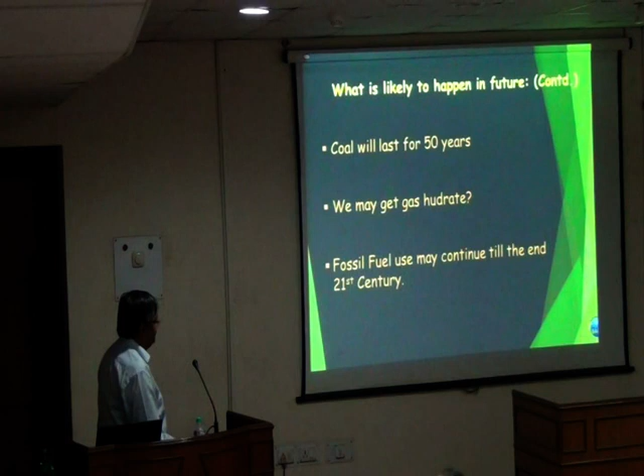So, in the long run, solar and nuclear will remain. Solar deployment is very easily possible, because you must have read in the newspaper that the government wants to put up 100 gigawatt electrical of solar capacity by 2020, or 2022. I don't know how it is possible, but it will be possible. But nuclear cannot happen so quickly. You have to plan everything, you have to open your minds, and long-term planning is required.

So this is the basic difference between solar and nuclear. Here you need lot of long-term planning. Here probably, if you have money, you can put this up much faster. Of course you have to get land. You have seen that for 100 gigawatt electrical you will need about 400 into 100 square kilometers of land. So again somebody has to get that land to make that possible.

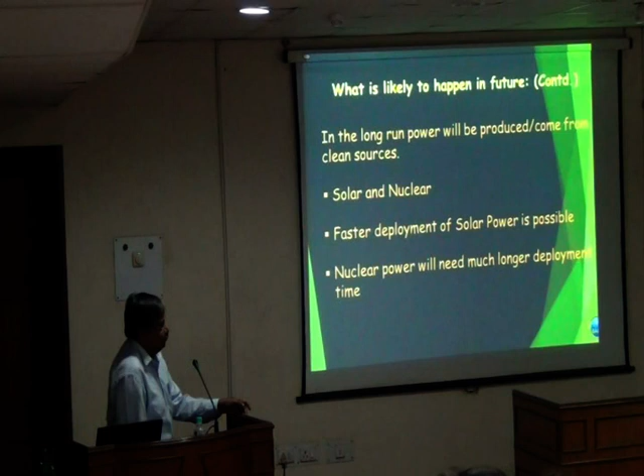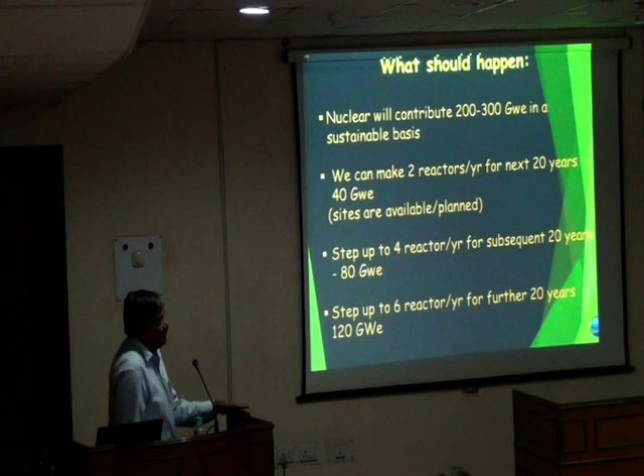And again, it's purely my views. We should concentrate on making 2 reactors per year for the next 20 years, whatever type of reactor it is. That will take us to 40 gigawatt electrical, and then we can step up to 4 reactors, and then maybe 6 reactors after another 20 years. So in the next 60 years, it is feasible to reach a top capacity of about 200 gigawatt electrical. Nobody agrees with me, but if somebody sits down with me for discussion, I can always explain my point of view.

And I am telling this to my DAE or atomic energy colleagues, that we must concentrate on uranium mining. We must build at least 2 reactors per year and solve the financing issues. Because today, financing issues are the most important, because money is not coming, and for nuclear power, capital investment is much more than any other system.

Then, as I have been telling many times over, we are the best in the world. I do not know whether you agree, but that much I can tell you with guarantee. How many reactors will come, I cannot tell you, but definitely in terms of technology, we are the best in the world in many areas. And the reason is that from 1974, when the Pokhran explosion took place, we have been denied everything. We cannot buy anything outside.

Atomic energy cannot buy anything from outside, even from an Indian company having collaboration with a foreign company - they will not give us. So everything we have to do by ourselves. That means we got into a situation of self-reliance, and whatever we do, we try to bring in the sustainability factor, excel, and make our nation stronger, because one of the main purposes of atomic energy is strategic purpose.

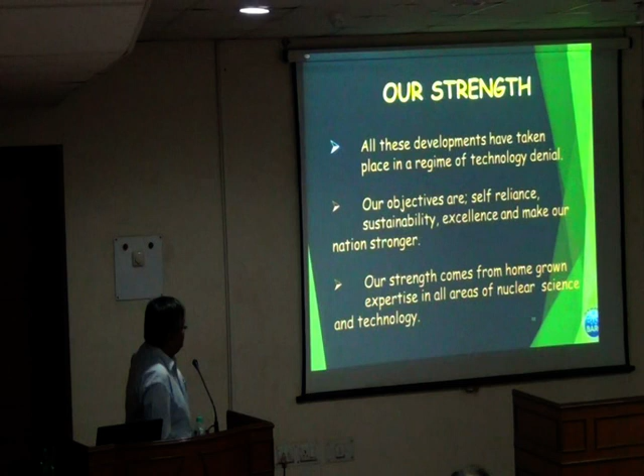Why was that possible? Because Homi Bhabha, when our atomic energy was formed in 1954, by 1957 his vision was that we should have a training school. In this training school, we take MSc physics, chemistry, biology and engineering students from the common branches. They go through a 1-year training program in nuclear science and engineering, and then become part of BARC, part of our atomic energy.

We must also know that atomic energy's job is probably the best in the country, at least the best in the government sector, because salary-wise we are better off than all others in government sector. We have a lot of freedom to do whatever we do, and whatever you would like to do as a scientist or engineer is available in our system. We always get a chance to contribute to science, to the nation, and to society.

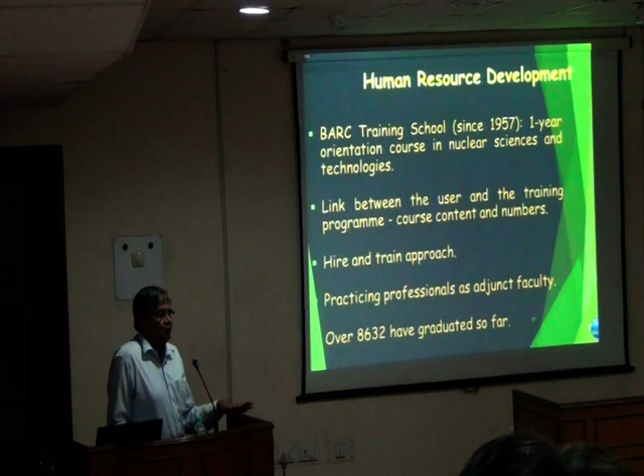That makes a difference - after you join, you will not understand this today, but if you stay back with us for some time, you will appreciate it. All my senior colleagues who have come from Bombay will agree to whatever I am saying.

We also have a university, the Homi Bhabha National Institute. It is a deemed university and it is an A-grade university, where all our colleges are part of that university. This includes BARC, VECC which you know, and similarly SINP, Saha Institute. We are all colleges of this particular university, and we teach there, and this is postgraduate.

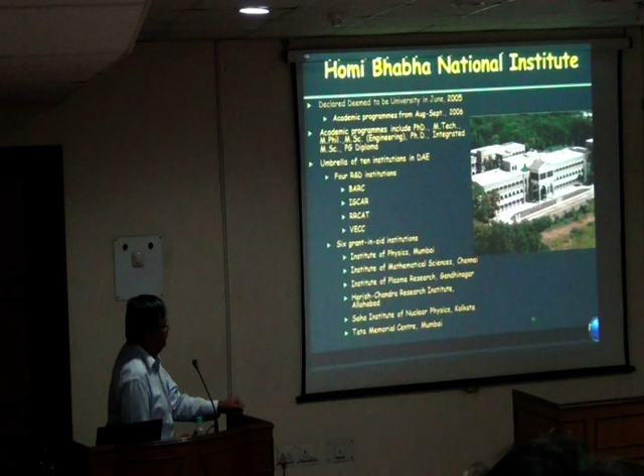Postgraduate means after MSc. All the courses taught here are after MSc, and those who join our training school also go through the MTech program. After the 1-year course, for 1 year they go through project work and other things, and then they get an MTech degree.

Okay, I have given my number. If anybody found anything interesting that I have talked about, you can always ask me. My idea was not to tell you about the technologies, but only to tell you about the concepts that are there.

Nuclear is a little complex, there's no doubt about it, and that is why this type of presentation should normally remain at a concept level. I have not gone into technical details.

I wish some of the students for next year to get an idea - I was just telling Professor Ray that in my batch, in 1974 when I joined BARC Training School, we had about 20 people, all from BE College. That time it was BE College. I don't know why, but now we have science - physics, chemistry - and also earth sciences.

So a lot of people can join us. And if you join, I can assure you, you will get a very good job - the best possible in India. Thank you.